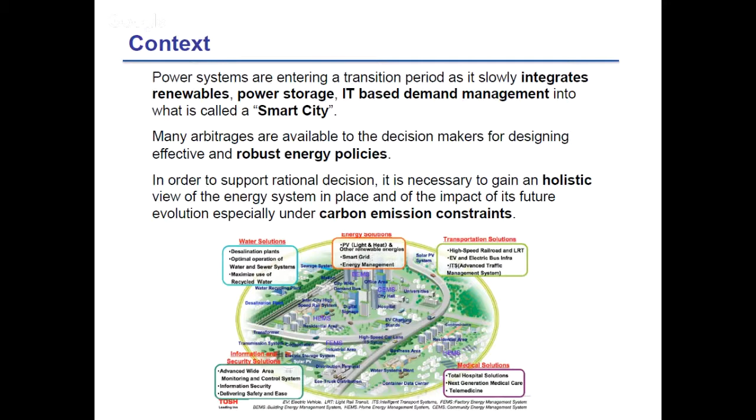So in order to support a rational decision and to see what can happen in the future, it is necessary to have this holistic view, this systemic view of the energy system in place, and what could be the impact of different carbon emission constraints under different evolutions of the energy markets. So that's the context. So in the future, you can expect new challenges for the supply chain of electricity.

First, you will have the integration in the grid of new actors with mainly decentralized production, mainly solar production, but you may have also combined heat production and so on. In order to face this volatile and variable renewable energy from wind and solar production, you need reserve, so you need clean backup and storage and so on. So there is also this challenge to address.

You can have also a change in demand patterns with introduction of new demands, such as electric mobility. So it might be a very huge increase in electricity demand. And in order to face all this challenge, you have either to reinforce the power transmission or distribution grid. But this is not the same if you consider the development of distributed energy resources.

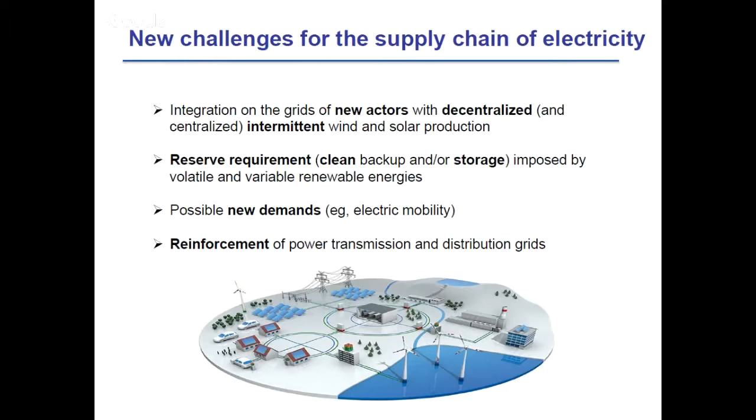You will have to reinforce the distribution grid, whereas if you consider the investment in large wind farms, you will have to have a precise look on the transmission grid in order to be sure that where you produce electricity, you can inject and satisfy the demand that can be at the other side of the transmission grid. But at the same time, with smart city, smart systems, smart technology, you have new options that are offered to the system.

So you have flexible loads, so you can adapt the demand to the production with demand response mechanisms. So it's a way to reduce demand variability, to help in the demand-supply equilibrium. Also, from electric mobility, you can optimize the charging of the batteries, for example, and you can also have in the future the integration of vehicle to grid. Vehicle to grid means that you can store electricity in the battery of vehicles and inject it back on the network when it's needed.

So it needs very huge investment in infrastructure, but if we consider this vehicle-to-grid system, it might provide some new option to address the demand-supply equilibrium. And the other interesting thing with PV panels is that they can contribute to reactive power compensation.

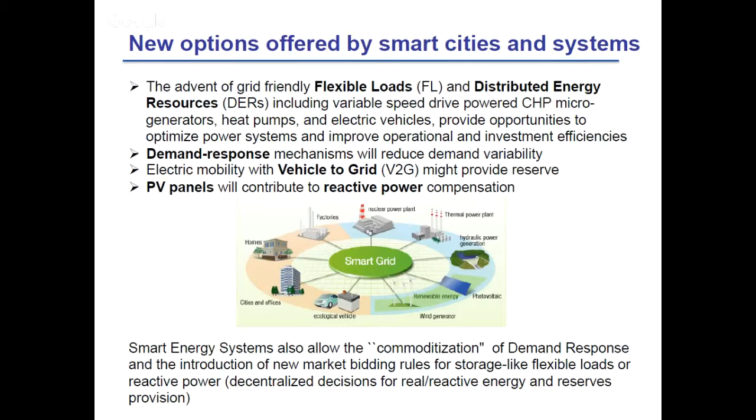There are two parts in electricity, real power that is consumed by everyone and reactive power. And when you have a high share of reactive power, it reduces the share of real power. So this is something that has to be addressed in some power grids. So there is this new option that may have to be taken into consideration in the assessment of energy systems. So from the point of view of the supply chain of electricity, there will be very big changes.

Currently we have very few utilities, but in the future we may have many producers located mainly at distribution level. We have mainly centralized production today, but tomorrow we can have decentralized production with new forms of energy. Production is quite stable today with hydro, nuclear, coal and diesel production. But tomorrow you will have intermittent and variable production in order to satisfy renewable objectives.

We also change the paradigm. Today, when you ask for electricity, production can adapt to your demand. But in the future, demand will adapt to production with the use of demand response, smart appliances and so on. So some part of electricity demand can be shifted from one hour to another in the day in order to satisfy the demand-supply equilibrium.

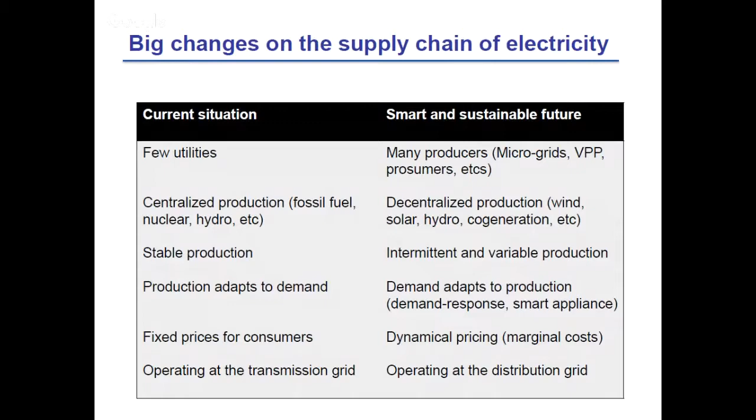Another interesting thing to consider when dealing with long-term evolution of the energy system is that in the future we won't operate at the transmission grid, but more at the distribution level, because you have many producers of electricity and you have to coordinate everything at the distribution level. So we have developed a system approach in order to take the different dimensions into consideration.

The first one is, when you are dealing with the long term, considering a horizon of 2050 or 2030, you first have to consider techno-economic aspects for investment in technology in the grid. What will be the optimal pathway for investment until 2030 and 2050? But for each year you have to be sure you can deal with operation constraints. So it's a dispatch problem: at each hour, each year, you can satisfy the demand for different energy services, in particular electricity.

Another dimension to be considered is the energy market, in particular electricity markets. You can consider that in the future, depending on your location, the marginal cost of electricity will differ. Another dimension is the physical network flow constraints. Depending on the constraints on your transmission grid, you might prefer to install wind farms in the north or in the south.

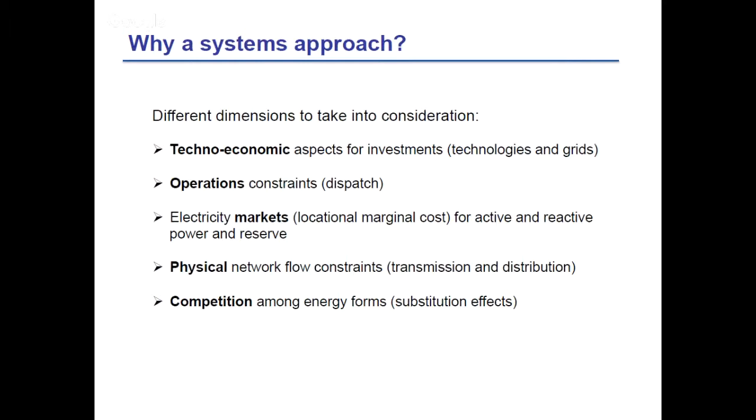So you have to take into consideration the physics of power flows when assessing the long-term evolution of the energy system, and also consider possible competition among different energy forms, depending on the marginal cost, the prices of imports and so on. What we have been working on is this complete framework, a model called ETEM SC for smart city. It is mainly a long-term capacity expansion model with dispatch constraints.

You have all the different modules. The first one is the techno-economic model, which will decide or simulate the energy system until 2050 in terms of investment, so you know the installed capacity for the future; the operation management, mainly the dispatch problem. Energy markets are based on an efficient equilibrium with marginal prices endogenously computed. Power flow physics means we can compute the flow on the different transmission lines at every time of the horizon, and smart city for the demand response that I will discuss later.

We also have introduced risk analytics, mainly based on robust optimization, to take into consideration the many uncertainties inherent to this type of model. You enter all these modules in the ETEM SC model, and it can simulate the evolution of the long-term regional energy system under different constraints and analyze the impact on the supply chain of electricity. We have also used it to assess the impact of climate change, and it is used to support the design of regional energy policies.

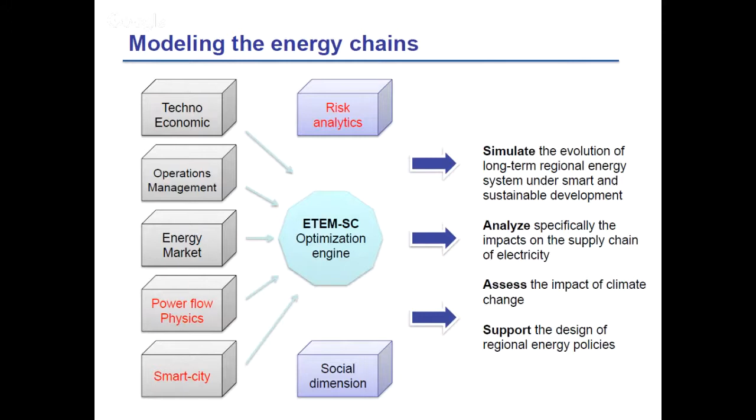The outline of my presentation: first, an overview of the model, then the different contributions at the distribution and transmission level, and a case study. So the model actually represents the entire energy system, from energy supply to demand sectors.

So it represents the extraction, import of different energy sources, how it is converted, production of electricity, heat, and so on, and the different technology demands. So it's mainly driven by the demand of services. So what you enter in the model is the demand for heating, for mobility, for cooking, for industrial needs in terms of energy.

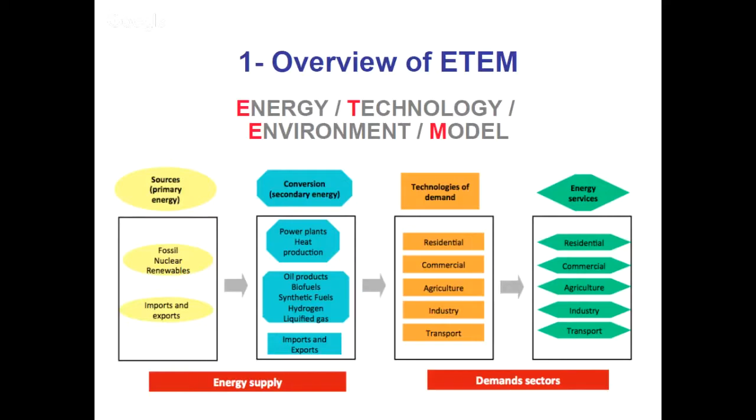So it's quite a complete model, depending on the disaggregation level that you may want. You have different energy services, and the model will have to decide what technology to use based on the cost and efficiency criteria, what technology will penetrate the market in the future based on this. So I will go more in detail in the next slides.

So I don't understand why I show all my slides, because some are hidden.

We have to start with a quite precise description of the existing energy system, to see how the energy system works today, what are actually the technologies that are used for producing electricity, for satisfying the different demand of services. So demand of services for mobility: if you consider just mobility, you have a certain distance to satisfy every year, for example, and you have to decide in the future if you will have a gas car or electric vehicles or diesel vehicles or whatever. So it's a model that will decide that according to a portfolio of technologies.

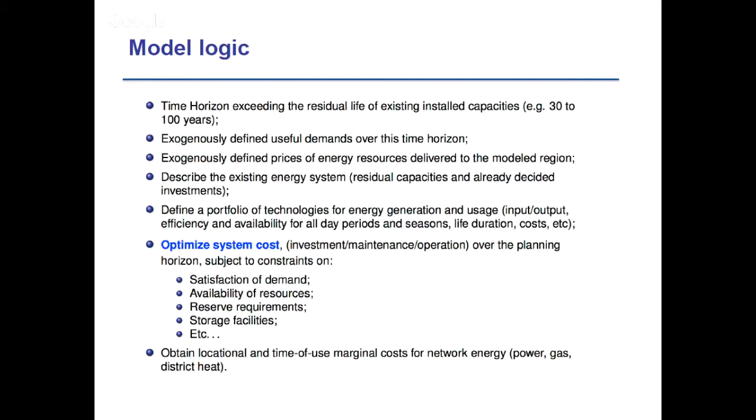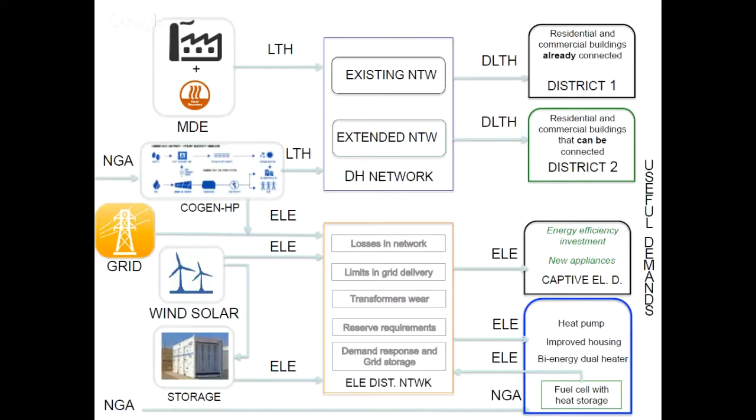ETEM is an optimization model that mathematically is very simple, because it's a linear capacity expansion and operation model. So it computes what will be the capacity in the future for each technology, and how to use it in order to satisfy the demand at each time step. So it's dependent on operation, capacity, importation, exportation, and so on.

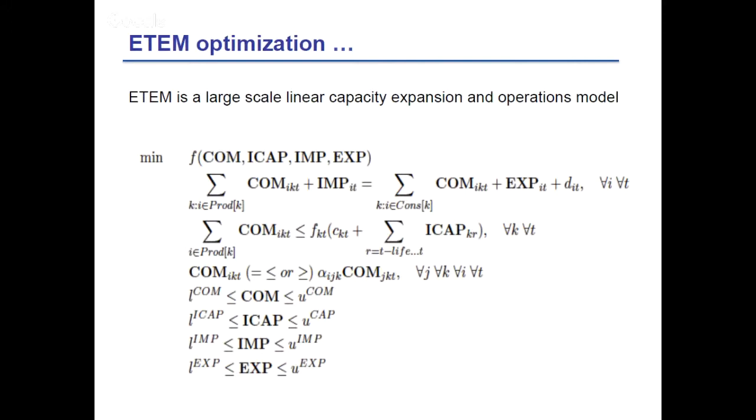But it gives also an equilibrium market representation, as actually the optimization routine optimizes or simulates the efficient energy market equilibrium, based mainly on dual solutions that indicate price-based arbitrage. So this is quite known in linear programming and in energy.

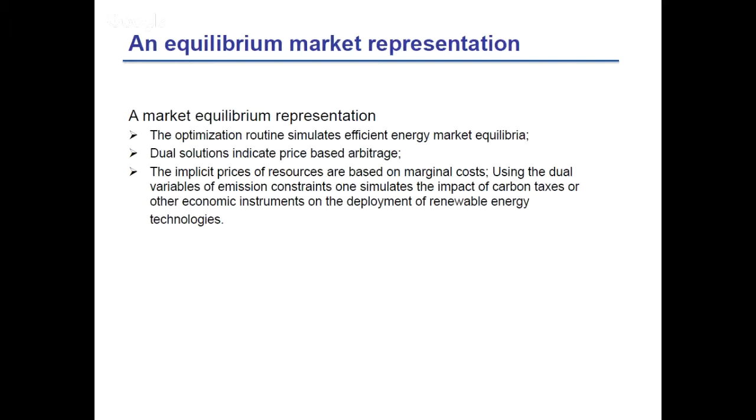So in summary, in the model the inputs are the current energy system, which has to be represented quite accurately to represent the existing situation. We have to provide also the evolution of useful demands, how the demand for different energy services might evolve in the future. Usually it is based on GDP evolution, population evolution, at the regional level. It might depend on whether you develop an industrial district or a commercial district, or on what you can expect in the future in your region.

You have to provide this, which is really important, this catalog of existing and new technologies, and some sustainable and environmental goals. So meaning that in 2030, I want to have 100% renewable, and what is the optimal pathway to reach this 100% renewable capacity.

I got a bit lost because you said that you have to feed your model with the demands. Yeah, it's useful demands. So the specificity of ETEM is that it does not start with demand for electricity or energy demand. It is a demand for heating, for example. So for heating it will be the number of square meters that you have to heat in the future. And depending on your need in heating, the model would choose between gas heater, electric heater, and so on.

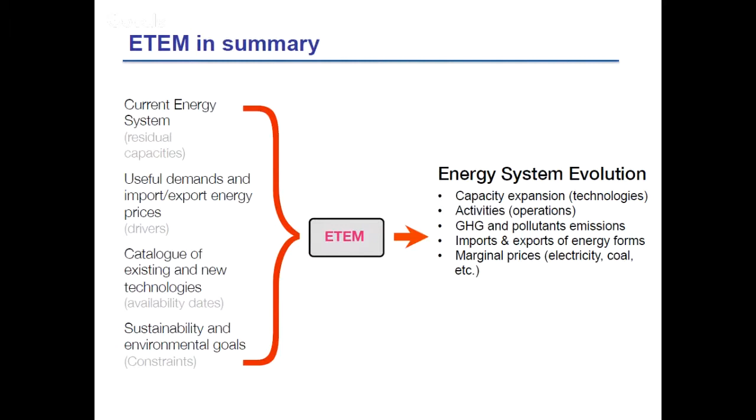This is focused on a national system. It might be used for a national system, but we use it on regional systems mainly. So it was what we did in the last decade. We developed this model, and recently we have been focusing our research on the power grid, how to represent it. I'm currently working for the French Ministry of Energy and the French Agency of Energy, which is called ADEME.

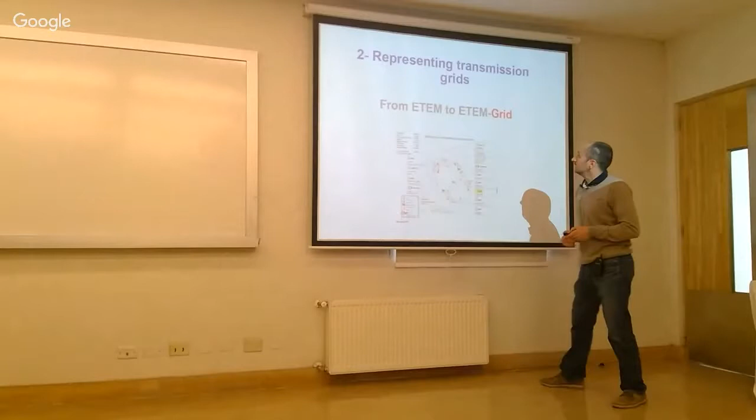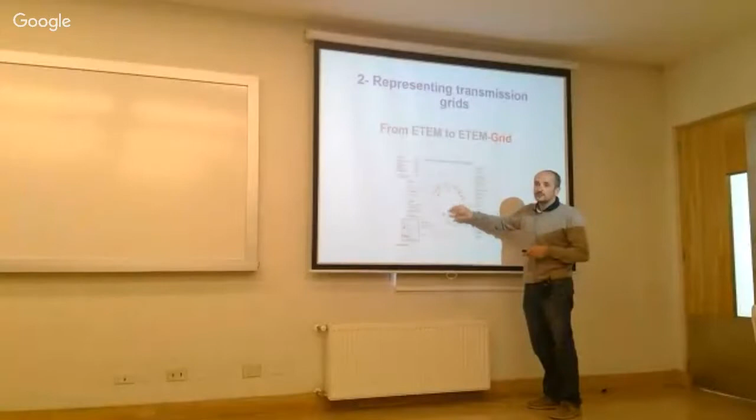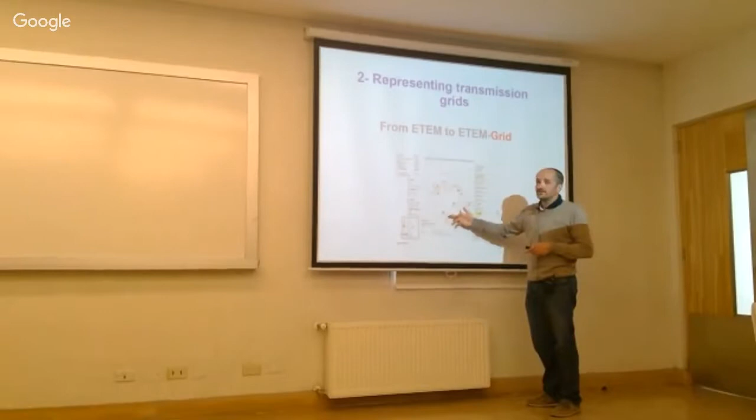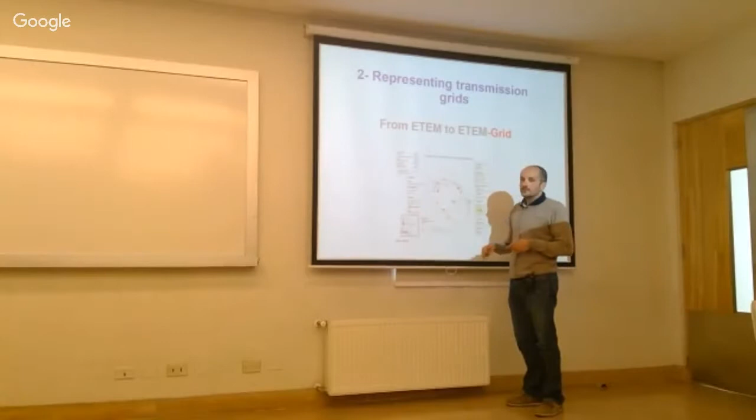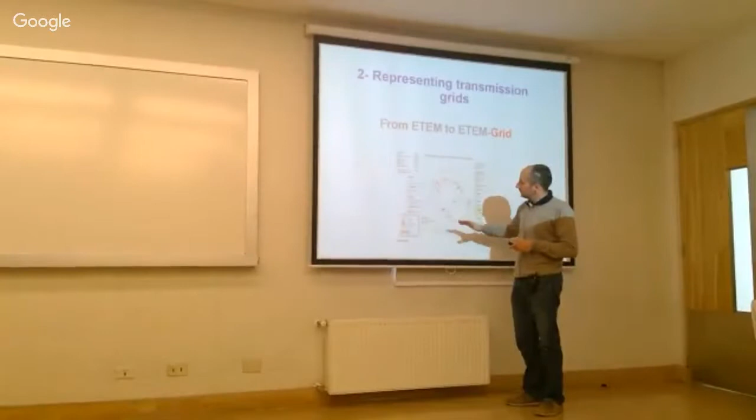But of course, the way you invest will have an impact on your grid. Because power flowing on the grid depends on physical laws, you have to represent physical laws correctly, and there are also some capacities. So if you decide to invest in a big power plant here to satisfy the demand there, you might have a problem. You will have to envision very big and expensive investment in the transmission grid. So what is important is to represent this power flow and transmission grid correctly, in order to make a trade-off between locational investment in production and transmission line reinforcement.

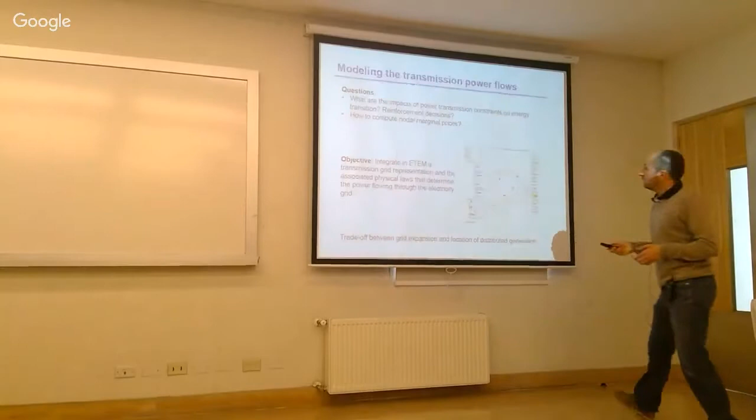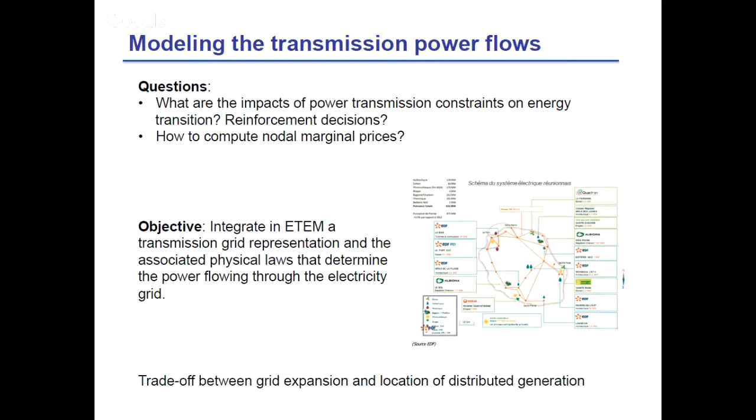Okay, so it's what I mentioned here. The question: what is the impact of power transmission constraints on the energy transition? Do I have to consider reinforcement decisions? That will be very expensive. So what I did here is to integrate in ETEM a transmission grid representation, considering the physical laws that determine how to compute power flow, and then the model will make a trade-off between grid expansion and location of distributed generation. That's the point.

Do you take into account the energy losses? The energy losses, yeah. For the transmission grid, we have an estimation of the losses, so we take them into account, but it's not quadratic. But at the distribution level, we consider it. We consider an AC representation, which is non-linear and non-convex, but through linearization and an iterative process, we are able to handle it. But I will discuss this point in the next section.

But here for the transmission grid, we do not consider this AC formulation because it was not very interesting. Usually, when you consider the long-term evolution of the transmission grid, it's enough to consider a DC formulation, which assumes that you have no resistance.

And what we have to provide to the model is the capacity of the transmission line and the susceptance, because if you have no resistance, you have only a reactance. So we have integrated in the model this representation, this linear DC formulation of the transmission grid, and if you have different nodes, it will compute the powers that flow in each line that also satisfy the physical capacity of the line.

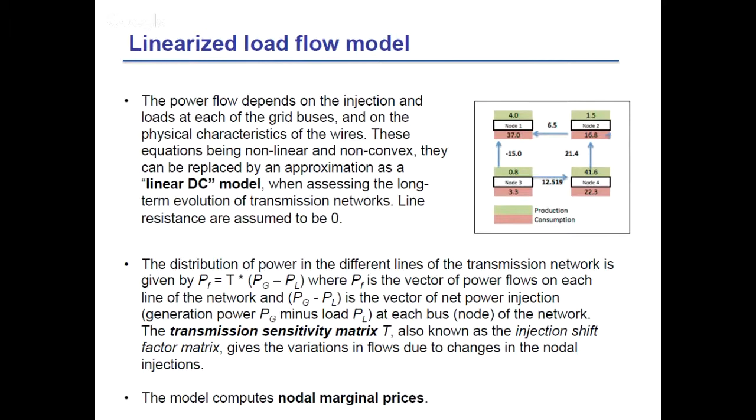And the model computes nodal marginal pricing, taking into account these different physical constraints, and one can also reinforce the transmission line in order to make this trade-off between the different possibilities of investment.

And here, just to show you what we obtained, the first results for this French island, La Réunion. In terms of installed capacity, it's aggregated at the island scale, but we have very detailed results, I'll show you in the next slide, at each node, each hour of the day, each day of the year, each year of the whole horizon until 2030.

What we obtain in 2030 is a big increase of solar production, but also in wind production, and biomass, and, it's not very easy to see here, an increase in hydro production as well, and geothermal production, which is the green part here. In terms of mix, you see a decrease in diesel electricity production, and coal disappears in 2030, and this is replaced by only renewable production.

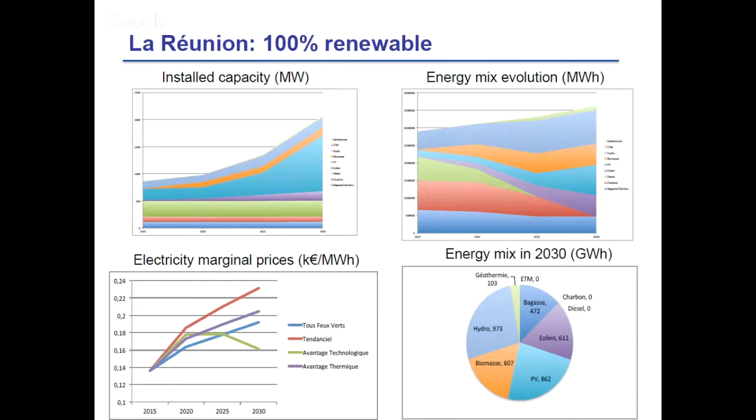And for this scenario, we have the evolution of the electric marginal prices given by the model, which correspond to this line. So we have a quite significant increase in electricity price, but it's a long-term electricity marginal price. And in 2030, we can have this kind of mix.

And here I just show you the power flow for the first semester, but for each hour of the year in 2030, we can see how demand is satisfied according to different energy production. But it's very aggregated, because for example in biomass we consider, I don't remember, 5 or 7 different technologies of producing electricity from biomass. Hydro we have from dams, from irrigation, from whatever. We have plenty of technologies here in order to satisfy the future demand.

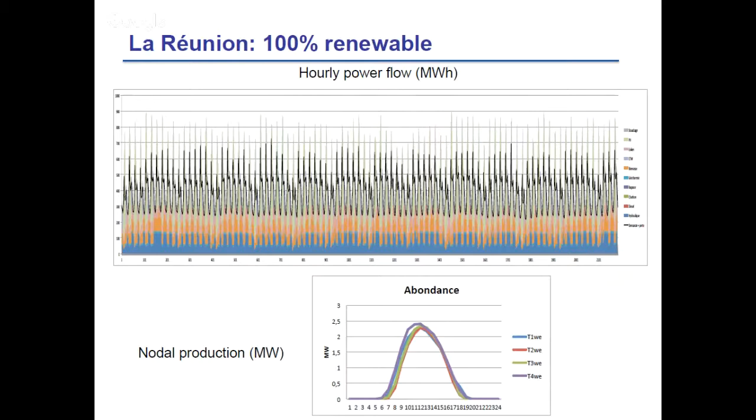And this is for nodal production. This is for a given node of the distribution level. We see for 4 typical days what the profiles of production are. Clearly, it is solar production, with production in the day.

We also compute for each time step the powers that flow in each transmission line in order to be sure that demand is satisfied and we respect all the physical constraints of the transmission grid. And the model computes 2 reinforcement investments for 2 transmission lines, this one and this one. So this is very detailed. So it's what I'm currently working on.

Yeah. That's with real power data, load data from the place, right? It's real. These are power flows that are computed by ETEM, by the model, and the loads are the input of the model. So we know the demand, the load at each node in 2030 at each hour, and we have to satisfy this.

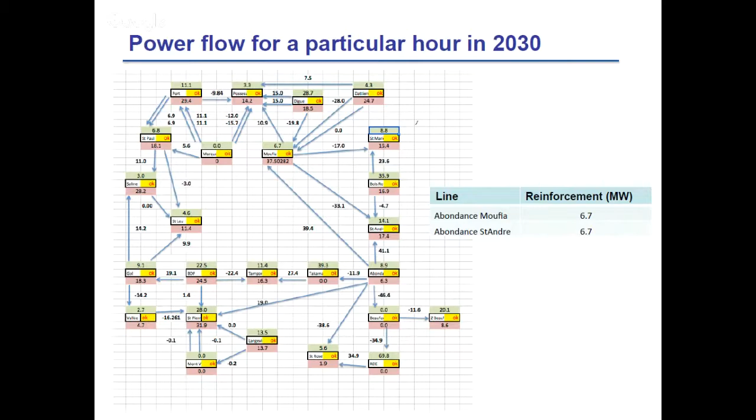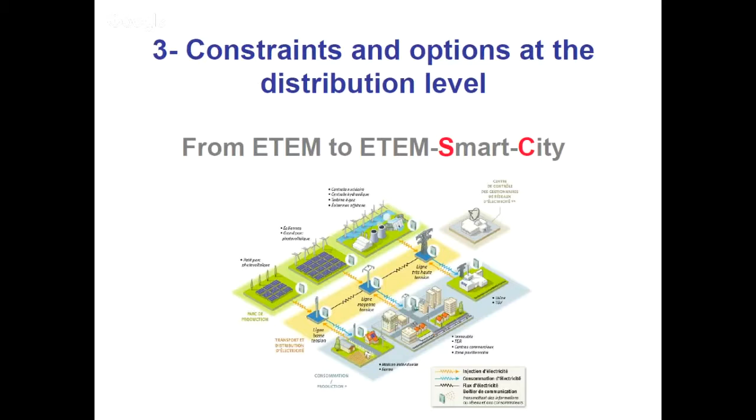So this was at the transmission level. Now at the distribution level, to take into consideration smart technology, the smart city concept. Here the objective was to model distribution options and constraints, to model more accurately distributed energy systems. So at the demand side, we have to take into account the possibility to move your demand from one period to another, which is done by demand response mechanisms.

Also the possibility to optimize EV charging. So if in 2030 you have an operator that decides to change your charging pattern because there are some needs from a systemic point of view, it might be possible.

Also from the production side, we have to represent correctly the distributed energy, solar, V2G, the possibility that the batteries of vehicles can be used as a reserve or as a provider of electricity. So, as I told you, you can charge the battery at some time and use this battery as a storage capacity. So when you need more electricity on the network, you can use a part of this electricity.

So the objective is to assess the role of these distributed systems, how they can help in the demand-supply equilibrium, provide secondary reserve requirements in order to stabilize the system, and also compensate for reactive powers.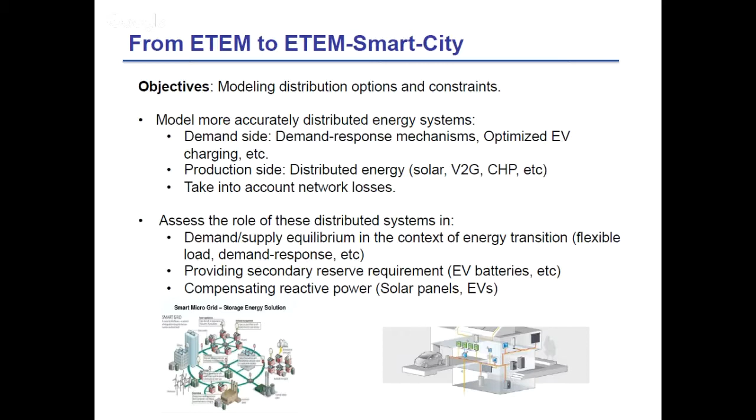So our assumption here: it was not possible to represent a very detailed distribution grid in a very big model like ETEM. So we actually represent each distribution feeder by one node. So it's really aggregated. At each node, we have an estimation of resistance and reactance of the whole distribution grid.

At each distribution feeder, we have flexible demand, conventional demand. We might have also demand for EV charging and so on. We can also have distributed energy production from solar panels and so on.

And all distribution feeders are connected to transmission lines, but we don't represent the transmission grid. So we have centralized production that can contribute to satisfy the local distributed demand, and at the distribution level, you also have distributed production and demands.

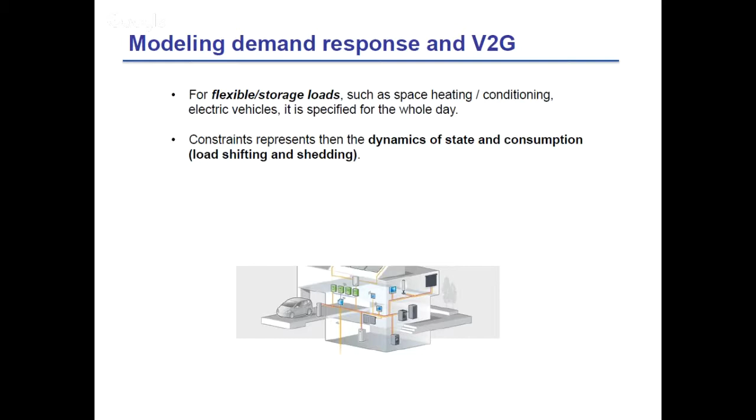And what has been done is first to model demand response and V2G, vehicle to grid. For demand response, what has been included in the model is mainly heating and cooling demand. So instead of satisfying directly a demand for heating, we introduce in the model some dynamical equation on the evolution of inside temperature.

So the model has a comfort zone. We know that for each building, you want the temperature to be between 18 and 21. And the model has to satisfy the demand to be in the comfort zone, but can actually, according to the needs of the system, reduce your temperature, increase it, and optimize the energy consumption for heating according to this comfort zone.

So it gives some freedom to the model to actually adapt to production variability.

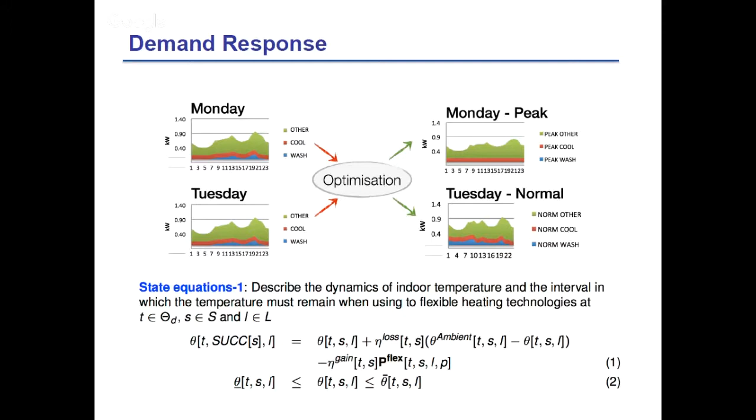We have the same idea for vehicle to grid, meaning that for people we have constraints in terms of charging. So we have a range of charging, constraints on charging, and the model can actually use electricity from the battery to satisfy other demands according to these charging constraints.

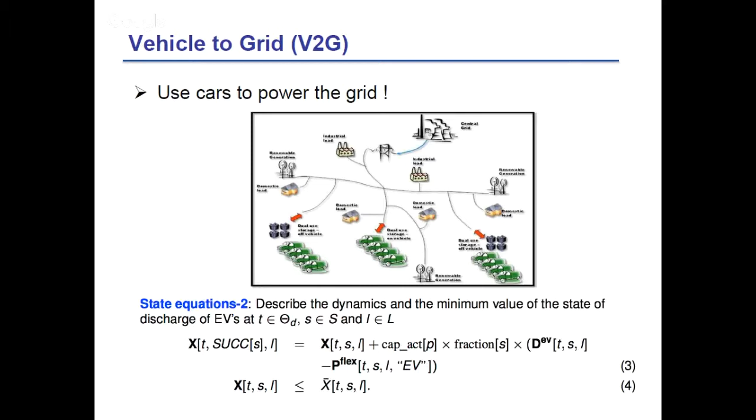So usually in the evening, when people use their car, you want your battery to be fully charged, so you cannot use the electricity from the battery, or you have less freedom on that part. But there are some dynamics that represent these constraints and the charging of the different batteries of electric vehicles, and the model can use this reserve to satisfy other demand and to adapt to the electricity production.

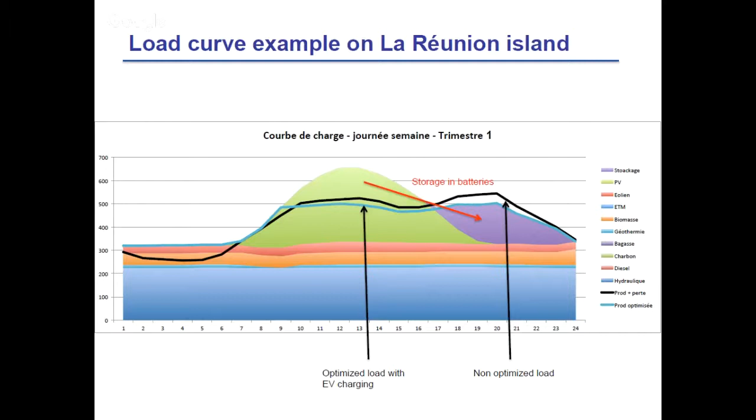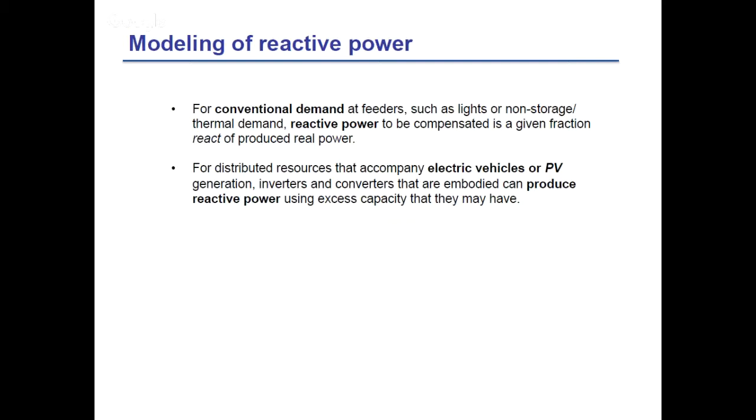The other improvement that has been added in the model is how to model correctly the reactive power and the losses at the distribution level. So for each distribution feeder, we have to compute what has to be provided by centralized production. So it's just a balance between distributed production and demands, for real power and reactive power.

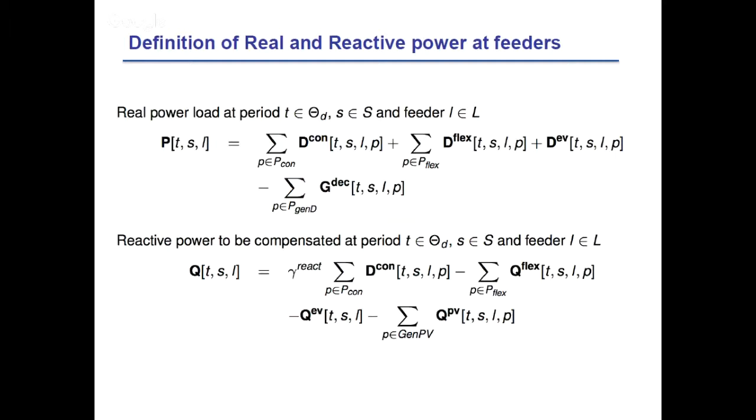And here we consider an AC formulation of power flows. So as you know, this is quadratic. You have the square of real power and reactive power, and when you put it in the model, it's really very difficult, intractable.

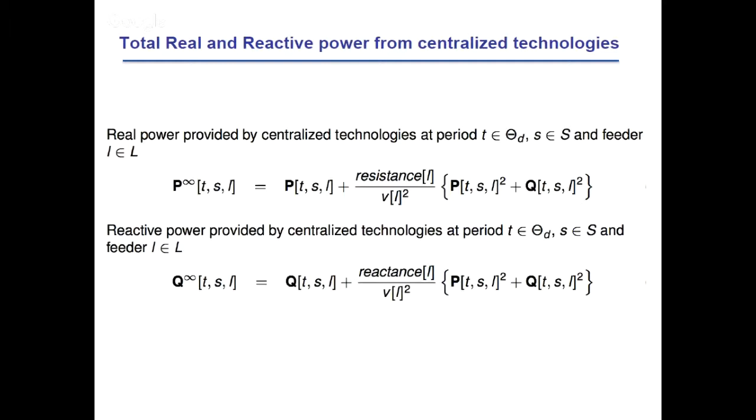So what we did here is that we linearize the equation and we update this linearization iteratively. So we first linearize, we solve ETEM with this linearization, and we change the linearization point, and in practice it converges in 5 to 10 iterations. So it's quite rapid in terms of iterations, while the model still takes a few hours to be solved. So at each iteration we have to solve a model that is quite time consuming.

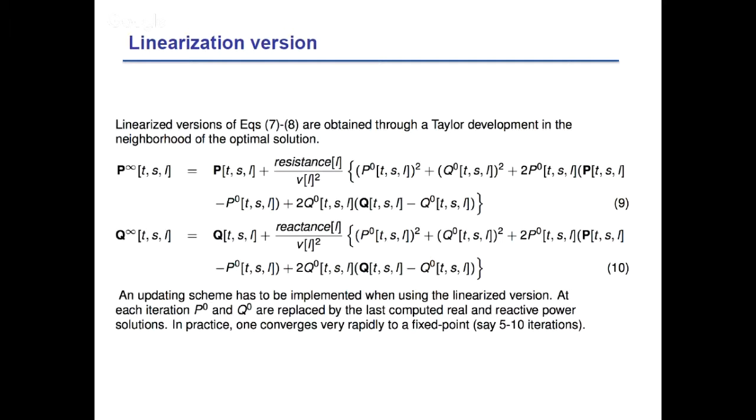So here is just a study that we did for a Swiss context, the Romandie. This Swiss region has 3 distributors. So we represent the 3 distributors and assume that smart technologies penetrate the system, and you simulate who is providing reserve and reactive power locally at the distribution level, to see how this reserve and reactive power could move from the current situation, which is mainly at the centralized level, and is replaced by

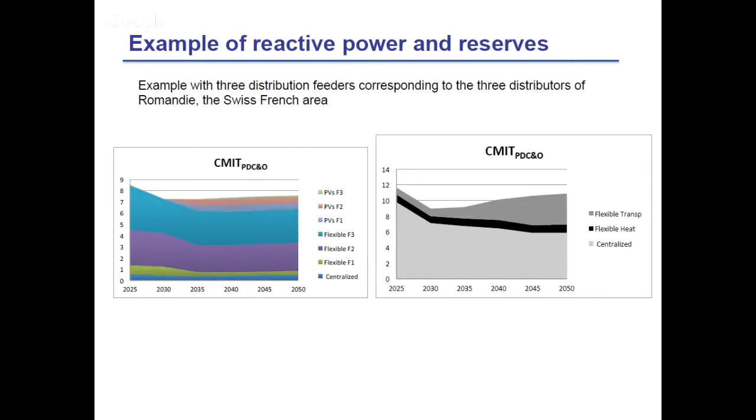a situation in which reactive power and reserve is mainly provided at the distribution level, by PVs for reactive power, and for flexibility it's EVs, electric vehicles. And you'll also see for secondary reserve requirements that transport is able to provide this reserve by exploiting this flexibility, and also with the ETEM. But okay, I don't want to spend more time on that.

So finally, what does the model do? You still enter the current energy system, but now you have to enter the technical parameter representation of the grids, either the transmission grid or the distribution grid. At the moment, the transmission grid cannot work together with the distribution grid, because one is in DC formulation whereas the other is in AC, so it's not compatible. That will be the next step.

And now the model can compute at the transmission level the reinforcement in terms of transmission lines, and compute power flows in an approximate way for the transmission grid and in a precise way for the distribution grid. We also have the losses, which are not mentioned here. Also, you have a distinction between real and reactive power, reserve requirements, and also demand response strategies. So it's quite complete.

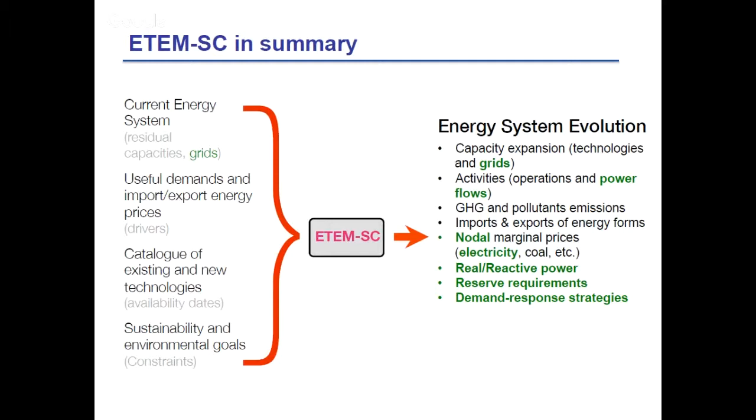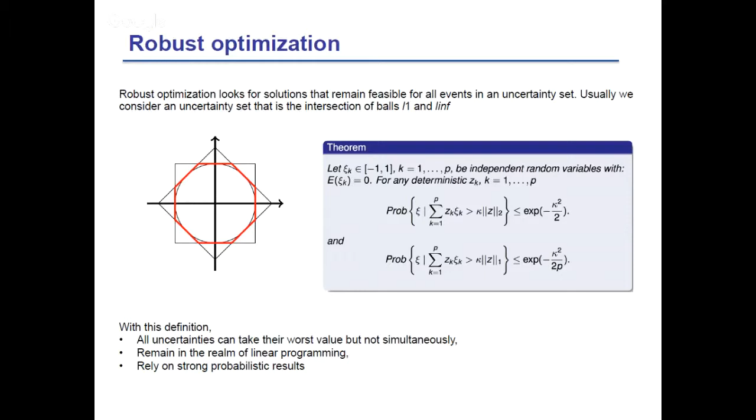And what I've been working on recently is how to represent and take into consideration the different sources of uncertainty in the model. The model is quite huge. We introduce this possibility, and I just want to mention that we take into consideration uncertainty in energy prices, technology costs in terms of investment, operation and maintenance. All this is in the objective function, but also in the constraints: technology efficiency and availability, useful demands. And we are able to take all this uncertainty into consideration in the same simulation.

There are two advantages of using robust optimization here. The first one is you have a reasonable increase of model dimension in terms of constraints and variables, so the model is still tractable, and we can model many uncertainties. The second one is it reduces this bang-bang effect that is linked to linear programming, and it leads to diversification in the technology portfolio in investment and in the mix.

And it's quite interesting because usually, for each scenario of uncertainty, you have scenario analysis. So for a policymaker, you say, you have an optimal investment strategy if you have this scenario of uncertain parameters. But if you consider this other scenario, you have a very different optimal investment strategy. So decision makers or policymakers are lost between the different possible optimal investment strategies.

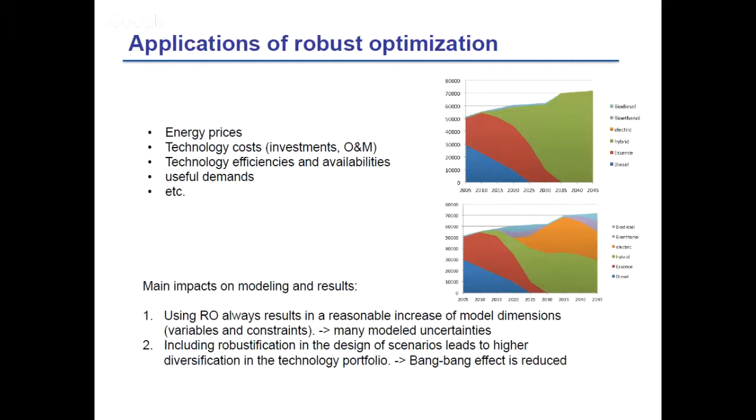How much time do we have? 10 minutes. 10 minutes, okay.

So finally, I will just discuss the case study that we already mentioned with Roberto and Adriana in Qatar.

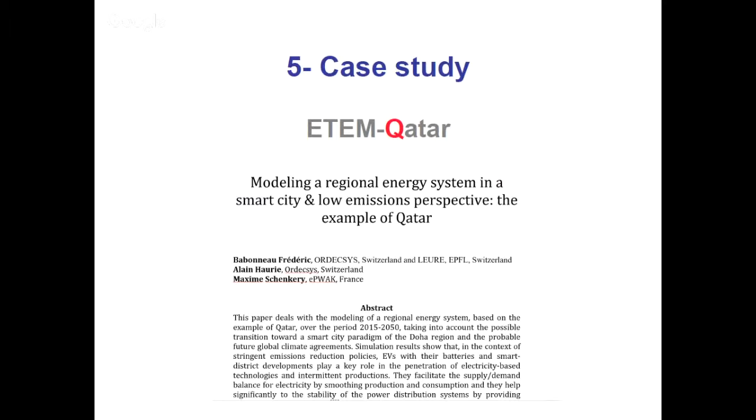So here, it was actually a study, a research project to analyze what could be the impact of smart energy systems on the future of the energy system of Qatar, in particular in Doha. It has been a research project with HEC and a local partner in Qatar. So we had to represent the existing system.

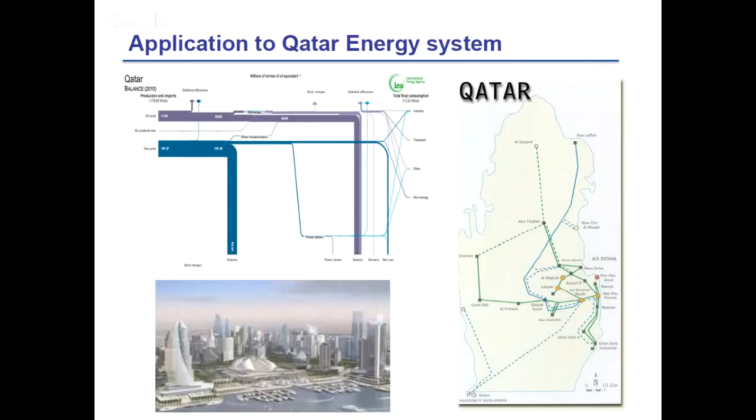You have to know that the energy system of Qatar is based mainly on gas. All electricity is produced by gas, and they are also extracting gas for exportation, but we do not consider this part of the industrial activity. So the first step is to represent correctly the existing energy system. We have represented the electricity supply, the private transport, the gas industrial sector, and water desalination, which is very energy intensive.

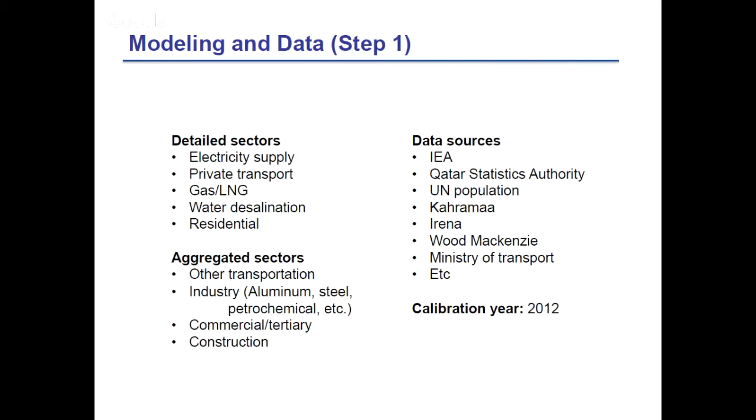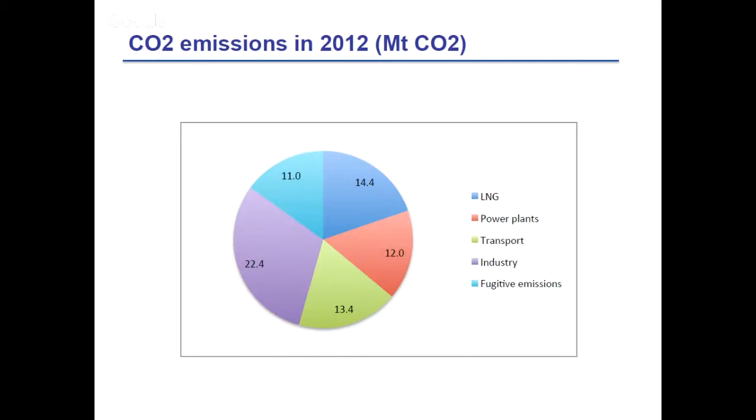And also residential. We have to get all this data from different sources. I won't go very much into detail, but we have to get all information regarding the gas, LNG, and oil sector, power, water desalination, and we were able to represent the existing sector and to retrieve the CO2 emissions in 2012 according to different sectors.

The second part: you have to provide the model with demand for services, useful demands, based mainly on GDP evolution and population evolution. So you have, for example, the demand for cooling, for captive electricity, also the demand for water, and the demand for private transport in thousands of kilometers.

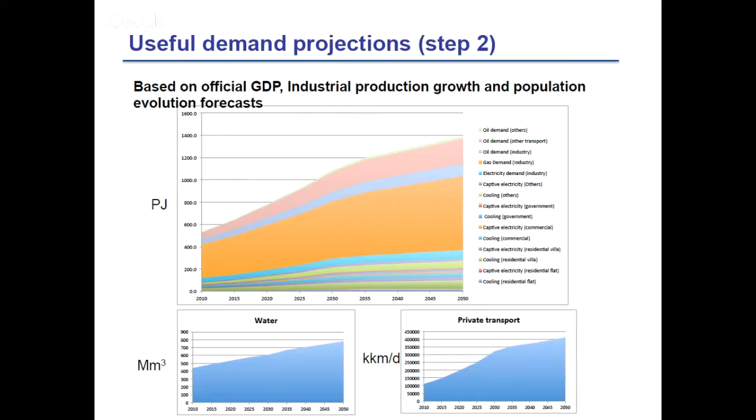We have considered different scenarios of evolution of the energy system of Qatar that we compare to business as usual. I don't want to discuss every scenario, but just to show you what kind of analysis and results we got. What I want to highlight here is the smart city scenario. We used a model to assess the impact of developing and implementing new smart districts in Doha, because they're actually building a new smart district called Lusail.

And what if we reproduce this smart district development for 30% of new districts? So we consider that 30% of new districts will be smart, meaning they will build upon this paradigm of smart integrated transport, with public shared transport, which is more efficient, and also smart district cooling, which is also more efficient in terms of energy consumption. We assume that at least 30% of new districts in Qatar will follow this trend.

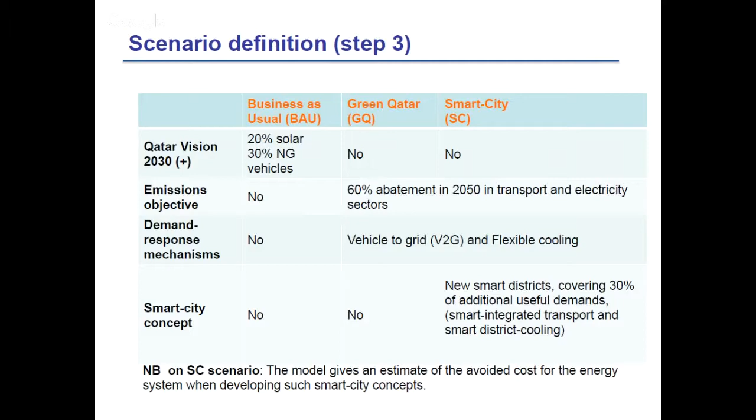And I wanted to just go to the final. So we evaluate and assess the evolution of the Qatar energy system to 2050 based on the smart city paradigm, and we compare two situations: one where you do not consider the smart district implementation, and the other where you consider the smart district implementation.

But when you consider this smart district, you have to consider the cost of implementing and building it, and we didn't have information on the overcost of smart districts. So instead, we do not consider this additional cost, but we see what could be the avoided costs in terms of saving energy by using this smart concept. The difference was about 10 billion in avoided costs over the whole horizon if you consider smart districts instead of traditional development.

How to interpret this $10 billion? If the extra cost of building new smart districts is higher than 10 billion, maybe it doesn't make sense to go in that direction. If you estimate that the extra cost is lower than 10 billion, it might be a good decision.